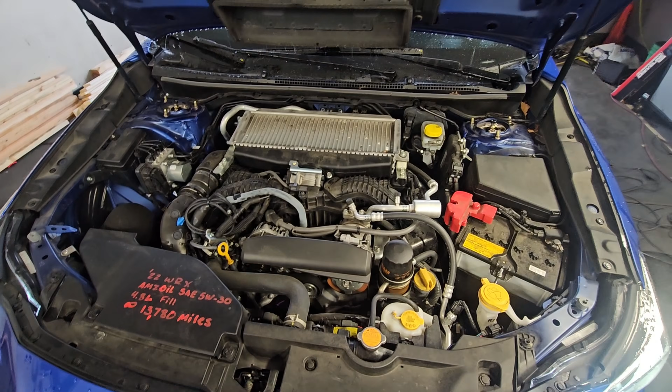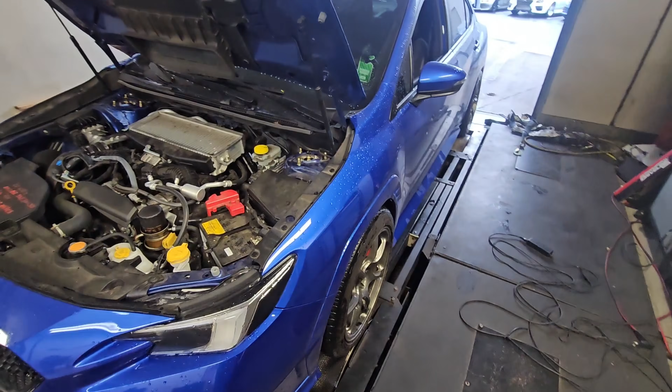I talk about these new VBs a lot, and I've been telling people everyone is sleeping on the CVT. I'm going to show you what I mean by that in this video today.

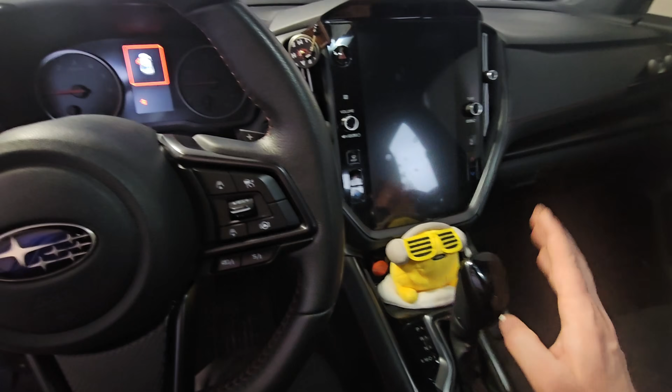Real dirty, but we got muffler deletes, we got coilovers, stock catback. Let's go see what's done up front.

We got a Perrin intake. I'm gonna guess it has an inlet because he's got this part here - this is part of the Perrin inlet system, so I can't see it down there, but I'll go look at the paper.

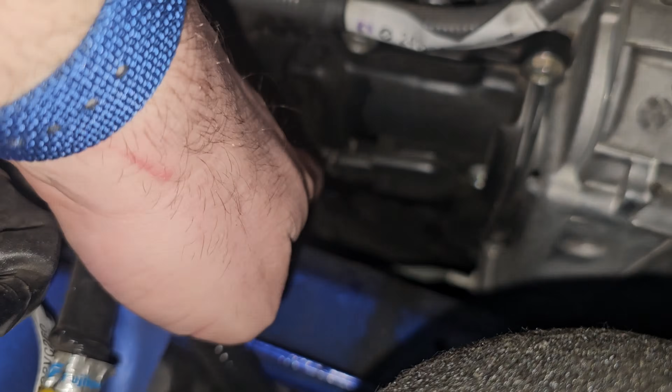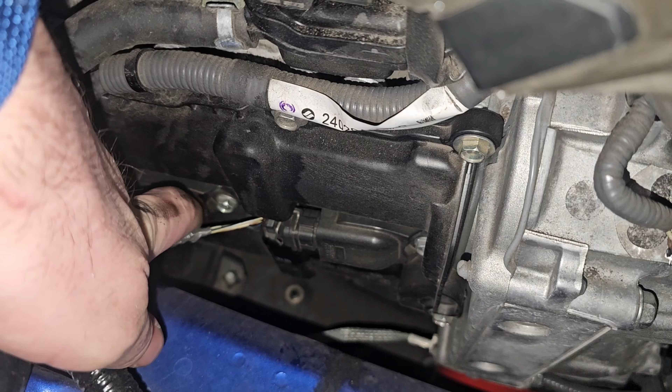Because this is a CVT, it's really important that we get a tach pickup on the car. Kind of a pain in the butt down there to get the tach pickup. What we have to try to do is get this pulled back a little bit on the coil pack, just want to kind of get the wires exposed so you can see that - there we go, now we can actually see the wires. We just pulled the shielding back, and then we just clamp around it before it shrinks itself back into place, and we're just going to grab all the wires. It works pretty good on these. There we go, should have a good tach pickup now.

Of course, I touched that Perrin intake filter when I was putting the tach pickup on, and that's one of the things I hate about the Perrin intake filters - they're just so greasy. I mean, I get greasy, I'm a mechanic, and I like Perrin stuff, I like the way their parts fit, I like the way they install, but the filter, come on guys, you gotta get that grease out of there.

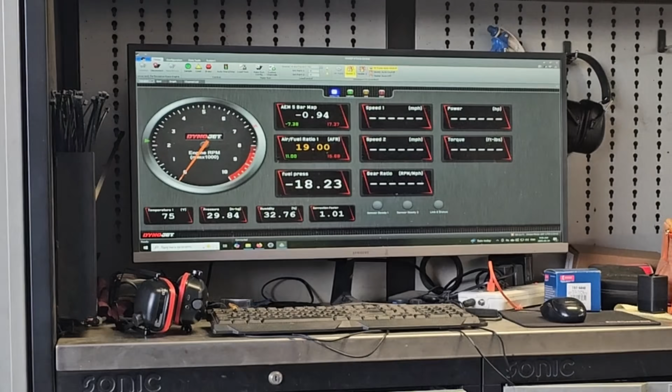So we're gonna start it up, see if we get tach. Get a tach signal here. Yep, there it is. And that is accurate to what we're at on this cold start warm-up mode.

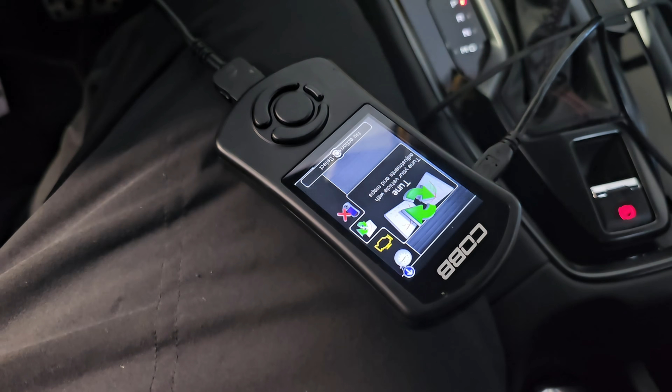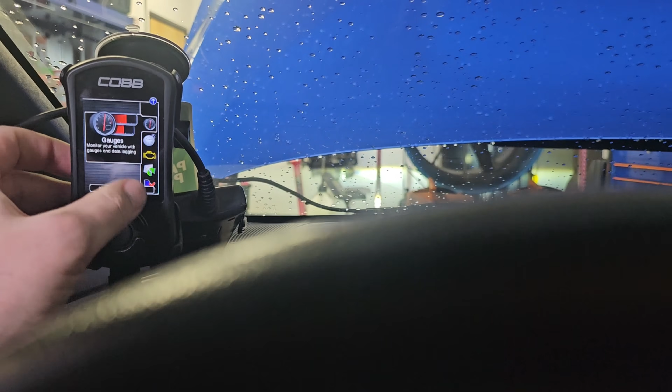I hate how these sound with the muffler deletes and the cold start warm-up, but to each their own, you know. First we got to update this Accessport - there's brand new firmware. And then we're going to have to uninstall this Accessport because there's a bug with the brand new firmware, but it's not too bad, and I'm sure it'll be fixed. It may already be fixed, I don't know, I haven't actually checked today to see if they fixed it. So I'm going to go ahead and uninstall this Accessport from the car, and then I'm going to update the firmware.

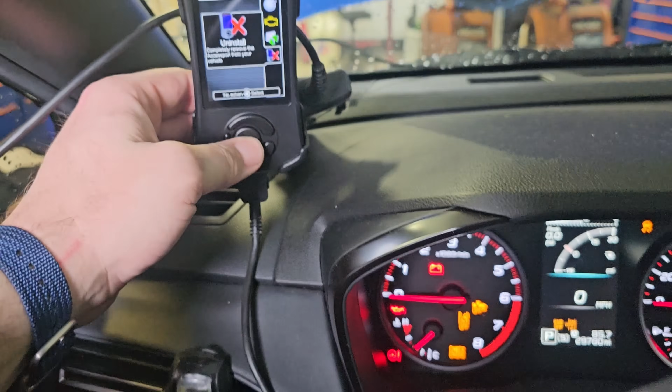When you're flashing, make sure you turn off the HVAC and the headlights before you start doing any kind of flash. Once the flash starts, you can't turn off the HVAC, and if you turn off the headlights, it's going to cause a voltage change - voltage is going to change quickly, and you don't want that when you're flashing a car.

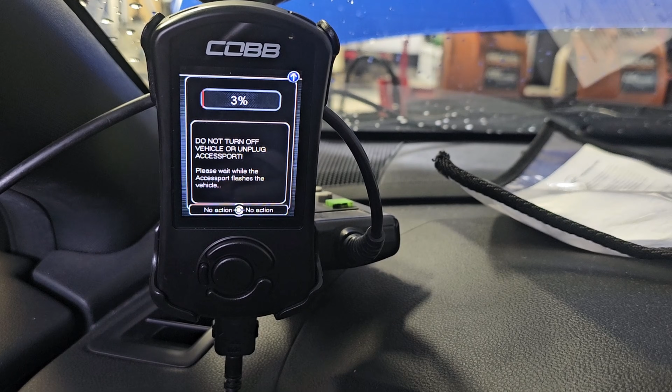We are plugged in, going to get the firmware up to date. So it's doing an actual ECU software update - I don't know if you can see it right there. I put the jump box on the car. I don't want to get out and show you, but it's always a good idea to have a jump box whenever you're doing software updates or things that are going to take a long time. As you can see, it's going to take a long time. It's going to have to do the software update, and then it's also going to have to flash the car, so it's two full processes of a slow flash.

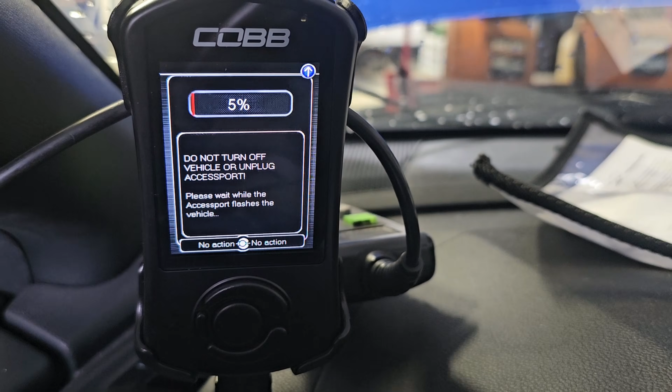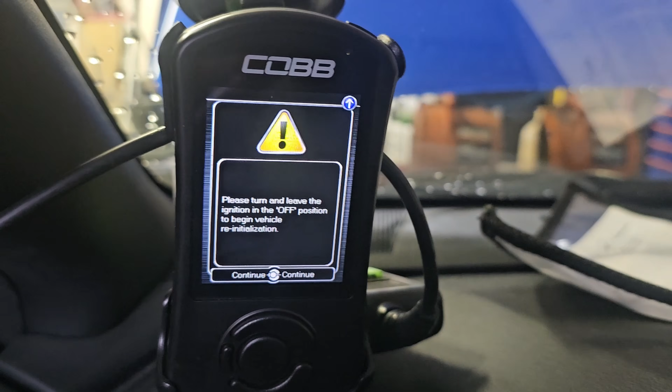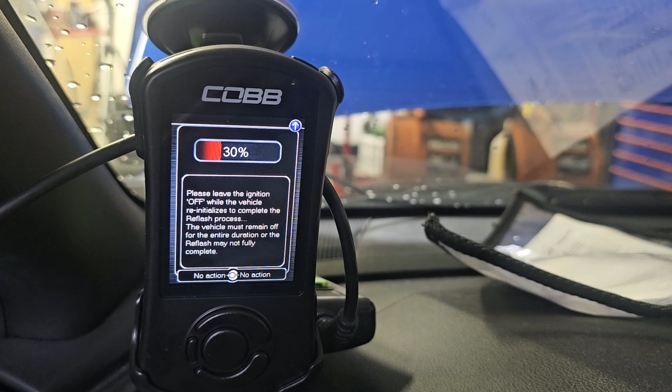Second part, and come on, you can do it! You can do it! This is a long process, but it's necessary, and you only have to do it once per car, which when you're tuning cars means you have to do it for every car if they haven't done it already. But whatever, it's part of the deal, it is just the process.

Sorry, my work order's up here, making it look all messy.

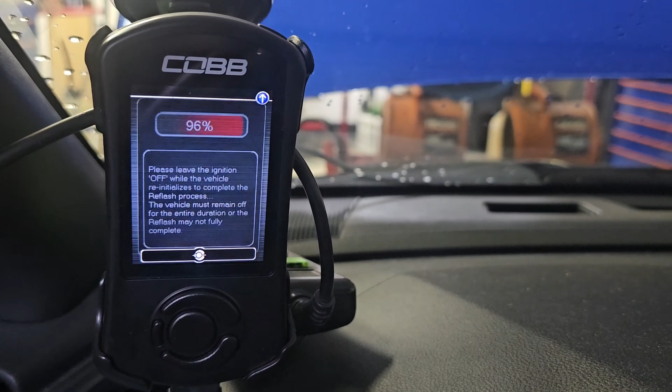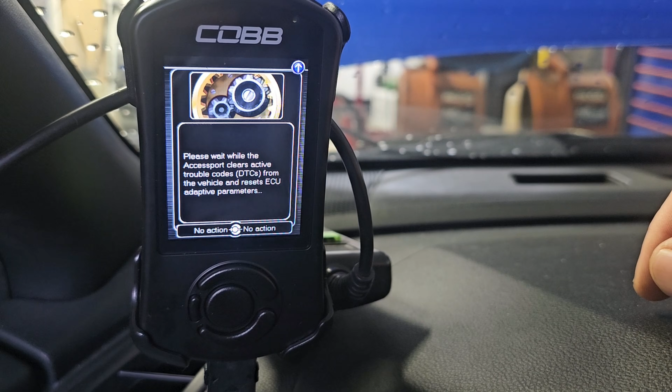And we are done with that. Cool. Success, great success.

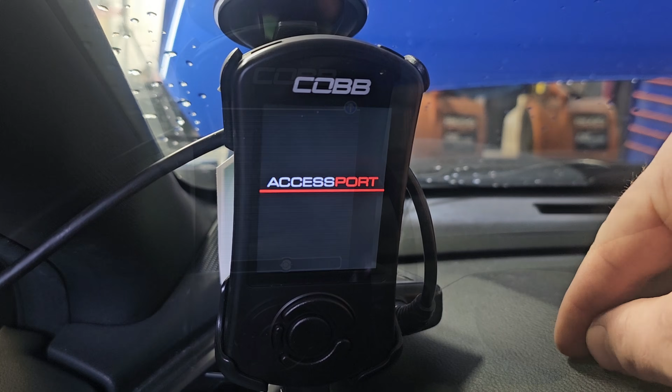I've been sending this out with the tune files - last batch, there it is, the VB. Fire it up. Hey, there it is.

Like I said, this is the CVT. One of the things that I like about these that is different than the manual trans is we have SI drive in this, so I can click and change modes - we can do intelligent, we can do sport, and we can do, oops, gotta hit the third button, sport sharp. Just like the STIs of the 2015 and up generation, I guess 2008 and up generation, SI drive, once you tune the car, can be used to give you multiple boost settings. So I can set this car up to have a low boost, a medium boost, and a high boost map that you can just change with the steering wheel.

On the manual trans cars, you have to go into your Accessport, flash a tune, and then you're done. So this just makes it easy.

It changes the throttle mapping, it changes the shift aggressiveness, and I can make it change the boost level, which is pretty cool. When I say it changes the shift aggressiveness, I mostly mean it changes the actual gear ratios that the transmission is targeting. These transmissions, because they're a continuously variable transmission, don't actually have gears, but they have target ratios.

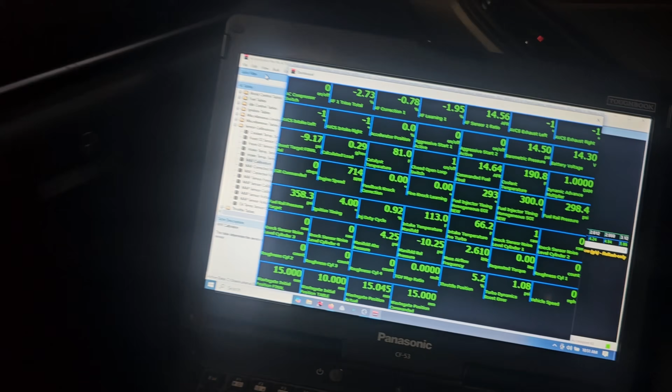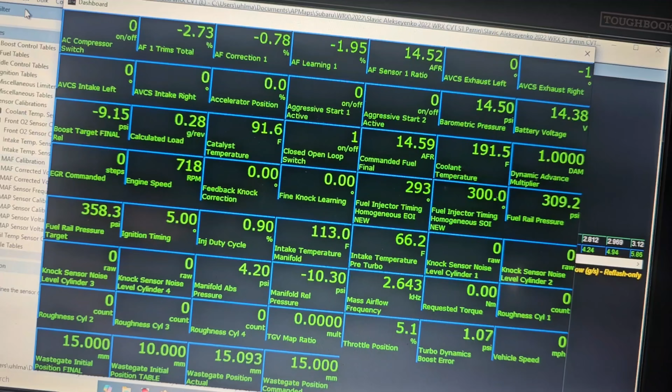I'm not going to show you guys the tuning process on this car, just because I've done it a number of other times, but I just like to show people how much data and how fast. In the older generations of Subarus, you couldn't log this much data this fast, and the more data you have, the better the tune is going to end up. So just so everybody knows, you can log a lot and you don't have to worry about the data stream getting bogged down.

That's my hack to disable EyeSight: sticky notes. Normally you'd have to go into the screen a hundred times every single time you flash the car and turn off EyeSight, or change customer settings on customer cars, which I don't like to do. So I just put sticky notes over it.

Okay, don't mind the hellaciously low number. That was only 10 pounds, and I have the timing pretty low as well. That's always how I start tuning. Everybody that's seen my channel knows that's what I do.

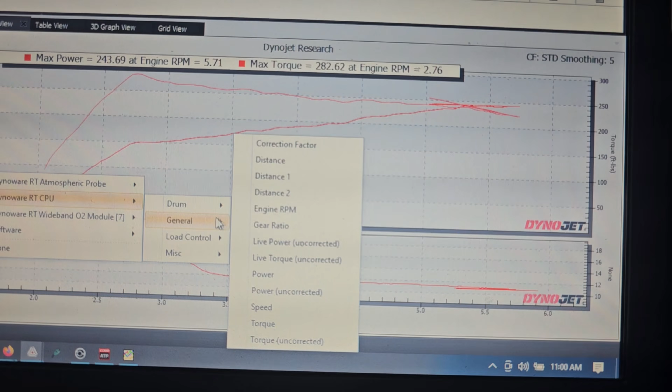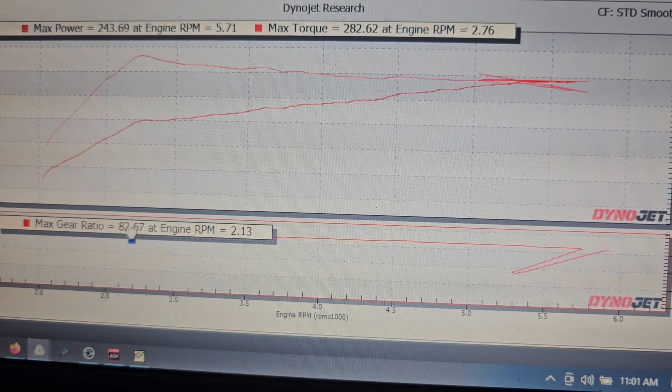So let's go in here. Fun thing about the Dynojet is I can actually log the gear ratio, so let's check the gear ratio. Now, I did have a little tach error - that's my equipment, not the car. But I wanted to show you, people talk about slippy CVTs - the gear ratio here, 82.67, there's no slipping. The ratio is holding true.

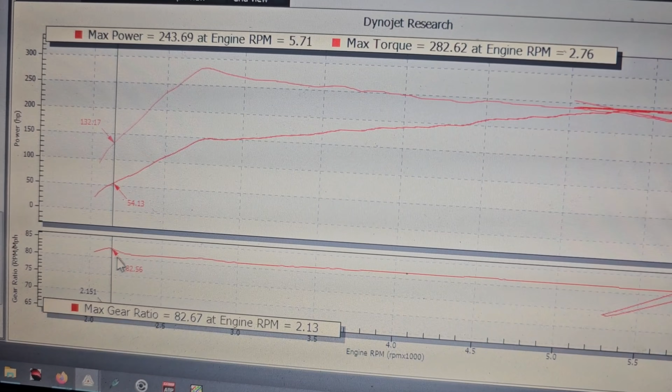We are 81.37 at the top of the gear, and clear down at the start, 81.32. This is when it's deciding what gear it wants to be in. But look at that, that's a CVT, and it's holding a single ratio as if it was a manual transmission. You don't see that normally. You don't even see this on a traditional torque converter auto trans. This is pretty wild, and this is what I was talking about - these cars just work with the CVT.

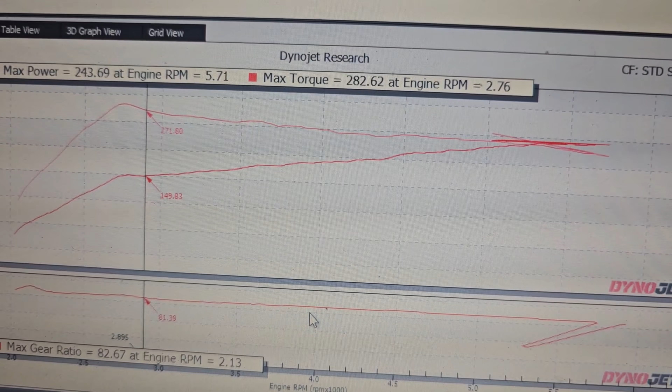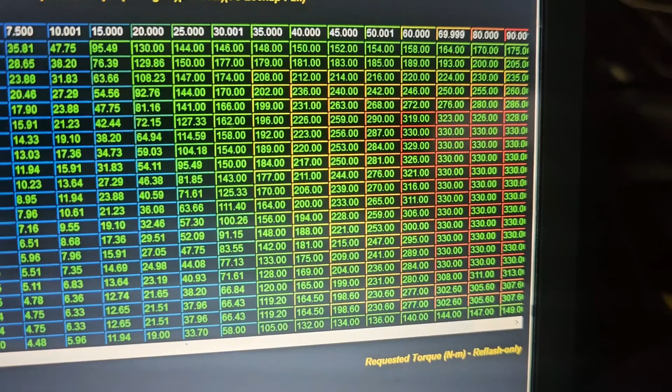It's wild. So I'm going to get this tuned up, and I'm going to make a lot more power, and I'll show you the difference. Lots of numbers - this is what I was kind of talking about. This is the requested torque in intelligent mode. 330 is our cap, so what we can do is adjust our boost targets - this is the power of the CVT, it's the power of SI Drive. I wish they would put SI Drive everywhere.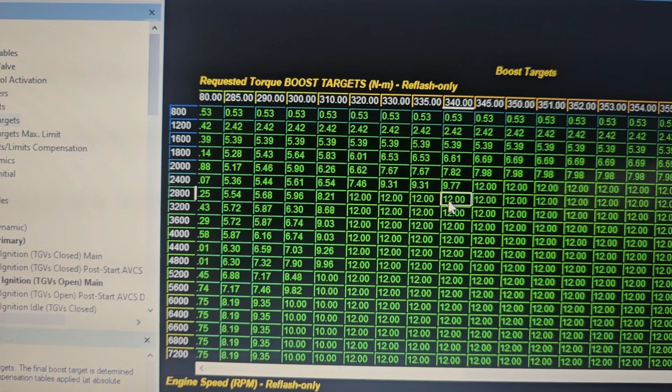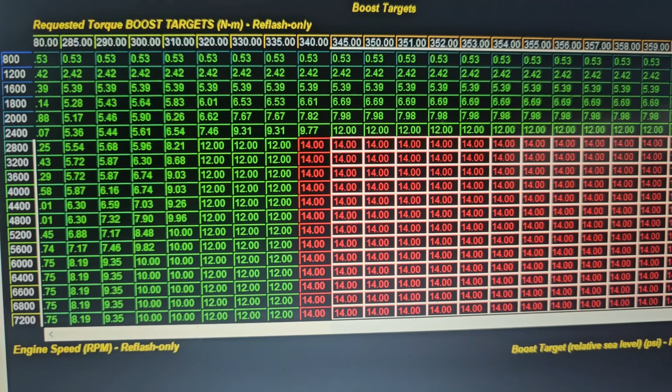So my target was 12 pounds - 330, 12 pounds, we're going to keep that target there. I like it. So 340, which is my sport target, we're going to go up to 14 pounds, and we're going to have 14 for this next pull, and everything but sport mode. So when I go back down - again, I added a little timing too, because I had the timing really low. So if I go to sport mode, let's just do - I think we're simulating third. Sport mode, I have it at 340.

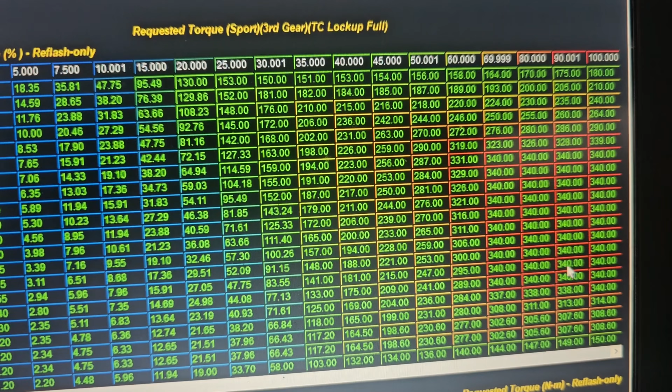And this is me not gatekeeping information, people. If you're a tuner and you're not doing this, you're doing it wrong.

Okay, just finished what's probably my last run on the dyno, although I might do another one because the GoPro battery died and I wanted an outside shot.

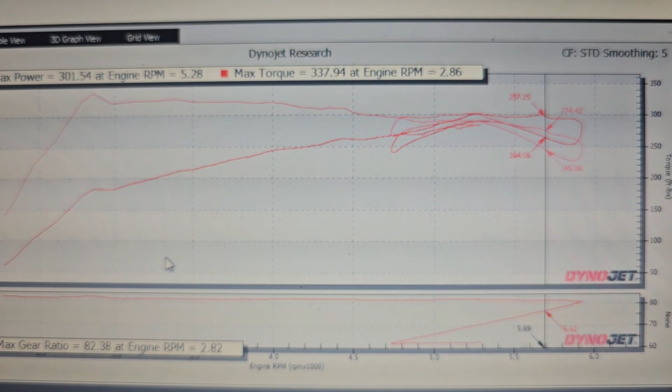All right, so the curly cues are because I shifted the car. We're making 300 horse to the wheels, 337 foot-pounds of torque. Once again, really good power. Like I said, even though these are a CVT, they work awesome. So what's this, why does it look like that?

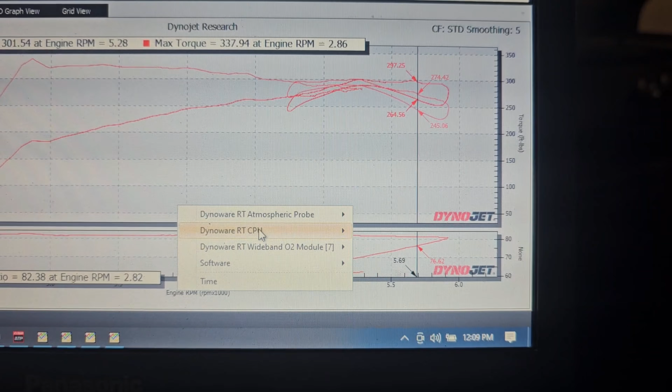Well, let's switch over from RPM to mile per hour. We're gonna graph by speed, and I'll show you what I'm talking about.

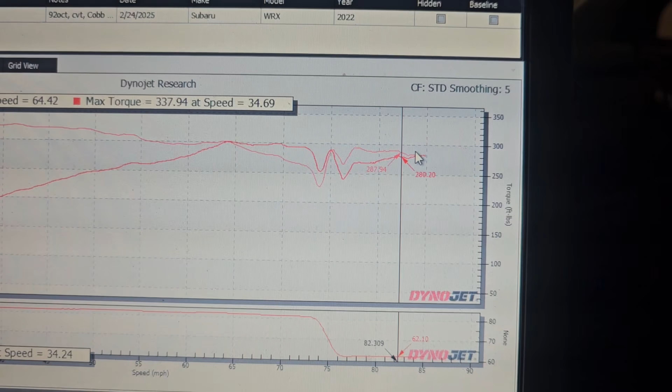So this here is a torque reduction on shift. Here we are holding 300 horse. We actually hit 300 horse twice, 299.65 twice. You can see how flat the torque is, it just basically holds flat. We shift, and then instantly I lift it off, I didn't let it keep riding out. But that shift happens super fast.

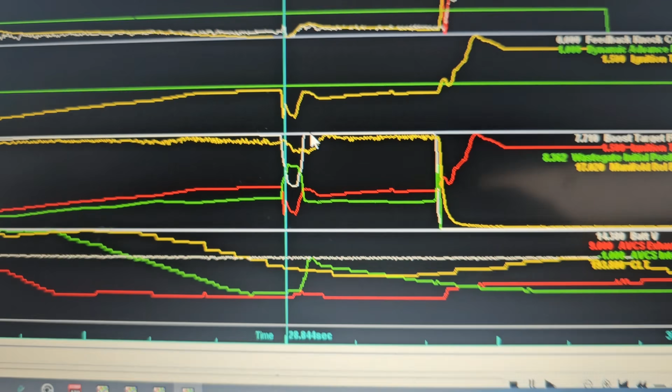Let's come over to the data log and see what happens on that shift. You can see again we have that torque reduction, and you can see it in the graph. This is because it's doing the timing, like a torque reduction, to try to save the trans. But it's not bad, it's very, very quick.

I'm shocked at how fast these shift and how fast they get back up into boost. It did drop a little boost on the shift, and that's because it dropped so much torque through the shift to try to make it smooth.

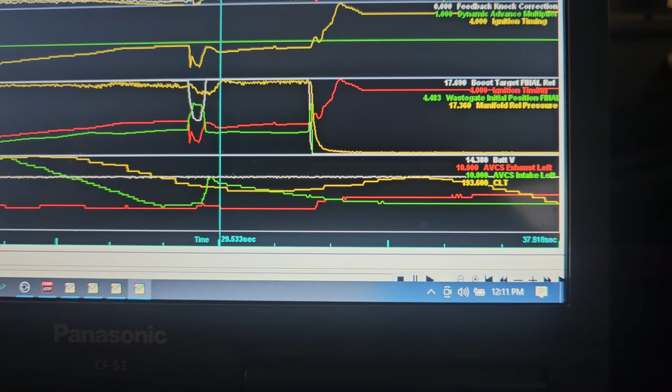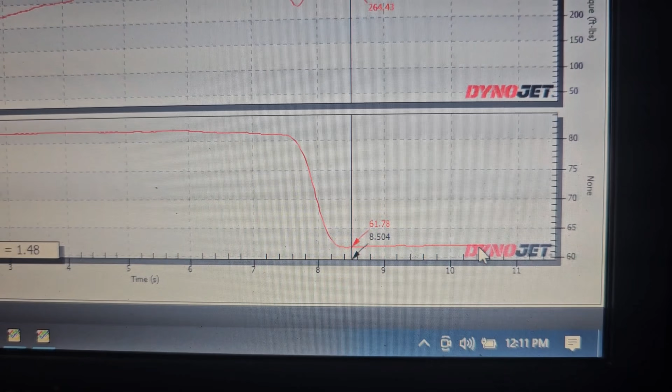But let's go back to the graph and look at gear ratios, like I was talking about earlier. Gear ratio is 81.27, the ratio at the beginning of the pull is 81.56, so it's holding that ratio really well. Then it drops to the next ratio, 61.78, and holds 61.7, 62.12. So you're not seeing a big drop through it.

Yeah, these things are pretty dialed. All right, let's do another pull for you guys, just so you can see what I'm talking about as far as shift time goes here. So here we go. I'm gonna shift it around 65. That's so crazy.

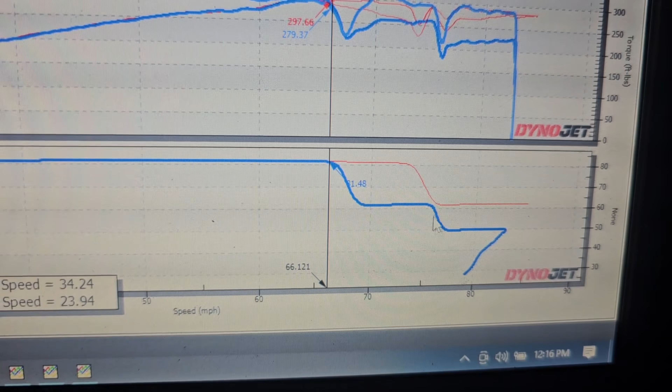I mean, it shifts like a DCT shift - I use air quotes for 'shift.' It switches ratios like a DCT, but it's not, it's a CVT. And it just does it constantly. Again, look at these gear ratio steps - ratios flat, step, step. It just works, man. It's crazy, it just works.

If you would have told me 3 years ago that a CVT transmission Subaru WRX, with just an intake, would make over 300 wheel horsepower, I wouldn't have believed you, not for a second. And if you told me it did that while also only being about 5 horsepower different from the manual transmission version, I also wouldn't have believed you.

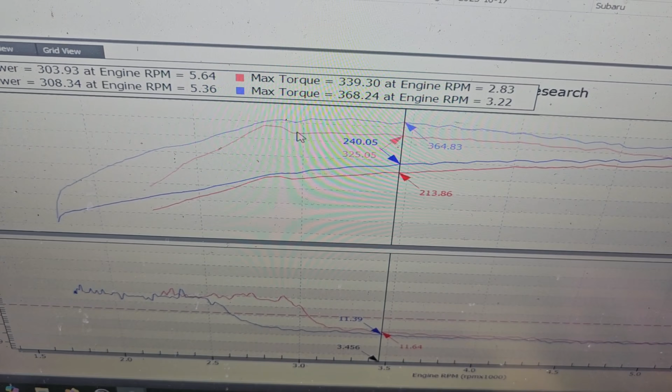Here, let me show you. So I've pulled up here, and the blue is a manual transmission, Perrin intake, stock exhaust car. And in red is this one. You can see the blue makes a little more torque, almost 30 more foot-pounds peak. But that top end power is almost identical.

And this thing being a CVT is gonna spend its time up top. Again, I wouldn't have believed it for a second, not one second. But here it is, doing it.

That's what I got for you guys today. Like I said, I wouldn't have believed it if I hadn't seen it, if I hadn't had these on the dyno doing this. I've had quite a few of them now, and I really wanted to make a video, especially after the auto show. I told a bunch of people that's what these were doing, and nobody believed me. So here it is, here's the video, here's the proof, the dyno proof.

Just an intake on this one. You put a cat back on them, I guess this has got a muffler delete. You put a cat back on them, you put other parts on, they pick up even more. It's wild, I don't understand it, but cool technology from Subaru, even though it's a CVT. Everyone hates the CVT, but it's working.

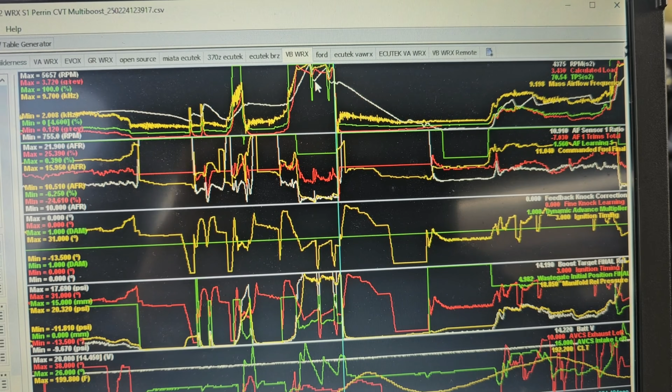For people who poo-poo about knock on these CVTs, I've got this thing tuned pretty good. This is almost a 10-minute log, just shy of 10 minutes, and there's not a single actual count of feedback or fine knock learn, and that included two wide open throttle pulls there. No knock, that was a 1, 2, 3 gear, so I went through 3 gears there. There's another one, wide open throttle there, wide open throttle here, wide open throttle, gear there, and then wide open throttle over here with 2 gears. So no knock.

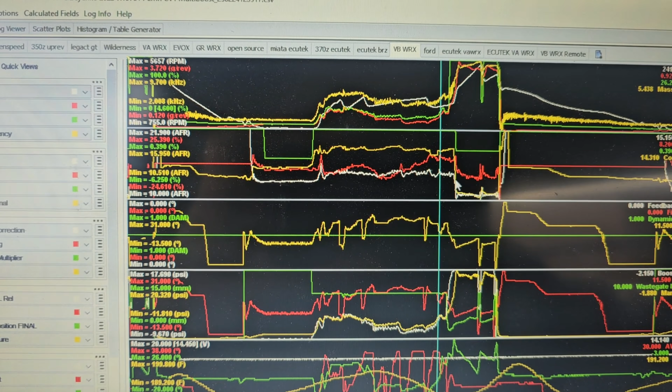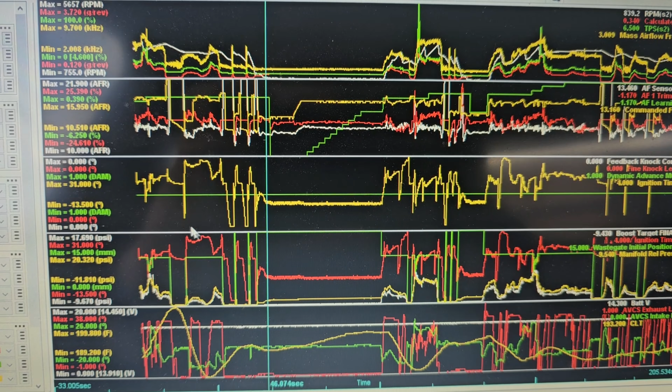Something that I'm actually surprised about - I'm surprised there was no knock. These cars tend to pull knock feedback and whatnot just kind of randomly, but it's an interesting thing to note.